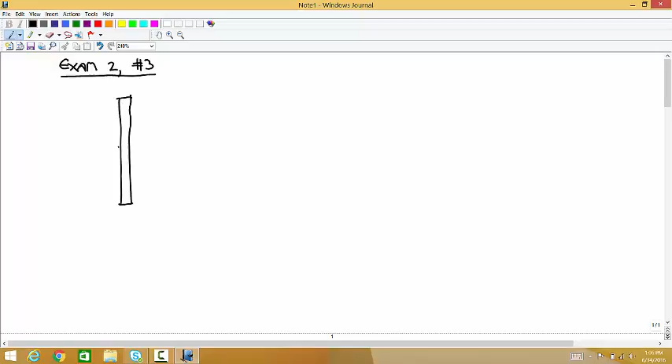So this is exam 2, number 3. It's the one with the beam positioned vertically. There's a 300 Newton force like that. It has a mass of 100 kilograms, so just to not clutter it up, I'm going to write it like that. But what this means is that that downward force is acting at the center. 981.

There's a pin joint at the top, so that's a full force vector. Then at the bottom, there's a pin and slot joint. And so you have a force with a known direction, call that RB, and you just represent that with one scalar variable.

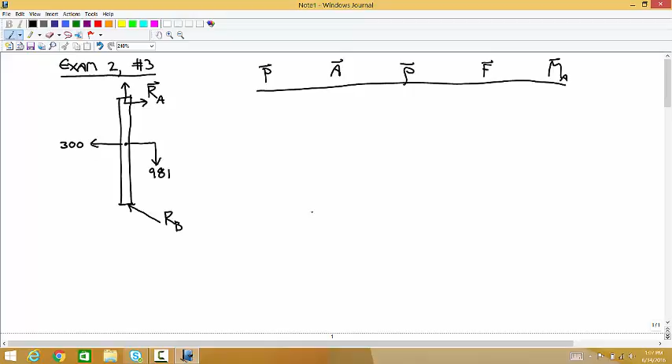And you can put your origin and about point wherever you want. I'm going to put both of them at A, at the top. So for that force vector RA, there's no rho vector, and so there's no moment.

This thing has a length of 2 meters. So these two forces that are acting right at the center are at the coordinates 0, -1. So the rho vector is 0, -1. The force vector, you can do them as two separate ones or combine them. If you combine them, you get -300, -981.

And then the moment is -300. And then the last force is at the bottom. That's 0, -2. The about point's the origin. So the rho vector is 0, -2.

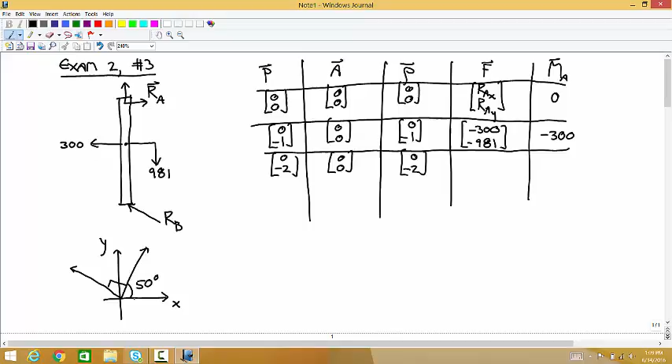And that force vector is at an angle, let's see. I think a good way to think about that is if there's your coordinate system, that slot makes an angle of 50 degrees with the x-axis, and then you have to go another 90 degrees to get to the direction that I drew. This is 90. And so this RB is acting at an angle of 50 plus 90, so 140.

So theta is equal to 140. And so that's -0.766 RB, positive 0.643 RB. And so you get whatever 2 times this is, -1.532 RB.

How did I get it? So on the coordinate system, I drew a vector that was pointing along the slot. And we know that the force is perpendicular to the slot, so it's 50 degrees to get from the x-axis to here, and then another 90 to get here. So 50 plus 90 is 140. Or I could have gone 50 to get there, minus 90 to get there if I'd drawn my arrow the other way. Or I could have drawn my first vector like this, and that would have been more complicated, but there's a few ways you can do it.

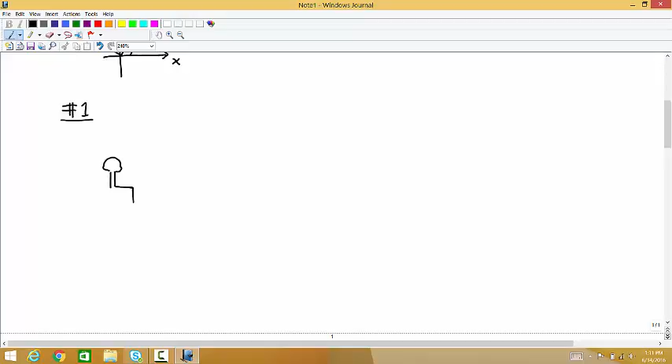So for these, you always isolate all the hanging stuff. So that's 1 pulley and the mass. The weight of this is 80 times 9.81, so 784.8.

And then coming out of what you've isolated are 2 cables. Well, it's the same cable, so they both have the same magnitude, but it's coming out at one point here and at one point here. So we'll call those both T since it's the same cable. And the angle representing this one is 80 degrees. The angle representing this one is 100 degrees. They're each 10 degrees off of vertical.

So Newton's second law says, well, this one is 80 degrees from the positive x-axis. This one's 80 degrees from the negative x-axis, which you could think of as 180 minus 80, so it's 100. And then the weight's 0, negative 784.8.

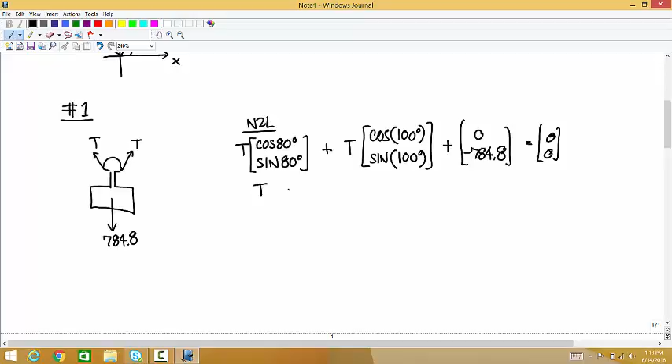And then you're solving for T. So that's for, and if you solve it, you get T is equal to about 398. So that's the answer for part A.

For part B, it's asking the force that the cable applies to the ceiling. So that's like, what's this force vector? Where this angle is 80 degrees. And so that force vector that's applied to the ceiling by the cable is equal to 398 times cosine of negative 80 degrees, sine of negative 80 degrees.

And then for the third one, the force you're looking for is the force the cable's applying to the wall. Where this angle's 30 degrees. And so the force on the wall by the cable is equal to 398 times the cosine of 150, sine of 150.

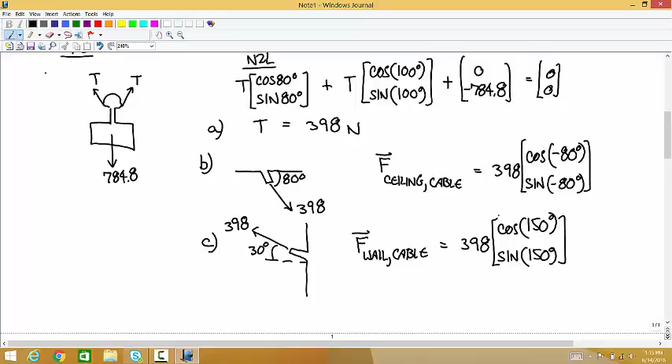By the way, what if I had asked what's the force vector that that pulley that's attached to the ceiling has to be in a fixed joint with the ceiling. What if I'd asked what are the loads applied to the ceiling by the, what do you want to call that, by the post for that pulley. Anyone have an idea how to do that?

Yeah, so let's just isolate that whole, let's isolate the pulley and the post that it's attached to. We're assuming this is weightless. So we have one force like this, we have one force like this, and we know what both of those are.

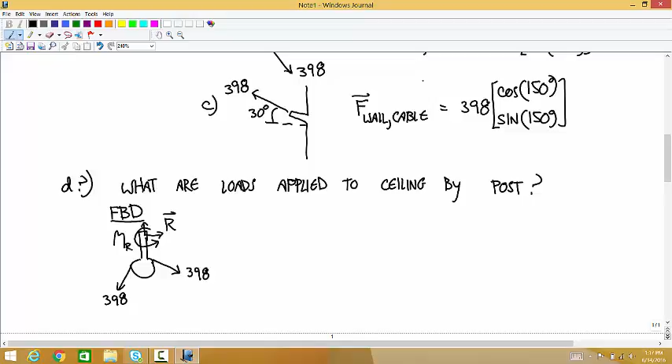And then this makes a fixed joint with the ceiling, so that means there's an unknown force R, and then a couple M R. And I guess if I had given this distance, this length, we could use Newton's second law and rotational Newton's second law to calculate R and M.

Any questions about that one? Any other questions about other parts of the test? I guess just the angle for the roller on number 2. Can you just set up that problem? Yeah, sure.

So number 2, it has a mass of 20 kilograms, so there's a weight of 196.2. There's a horizontal force of 500. There's a pin joint at the bottom, so I'll call that RA. And then there's a roller at the top, and that's perpendicular to the surface, so we know the direction of that.

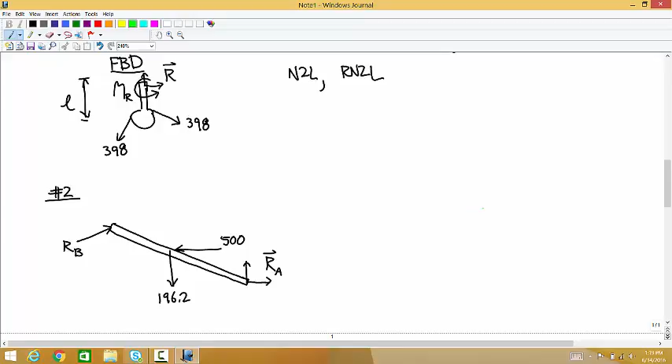To come up with that angle, I guess you could think of, okay, so there's a vector that is directed along the surface, and we know that this angle is 60 degrees. So to go counterclockwise from the positive x-axis to this vector is 120. And then we know our vector is perpendicular to that.

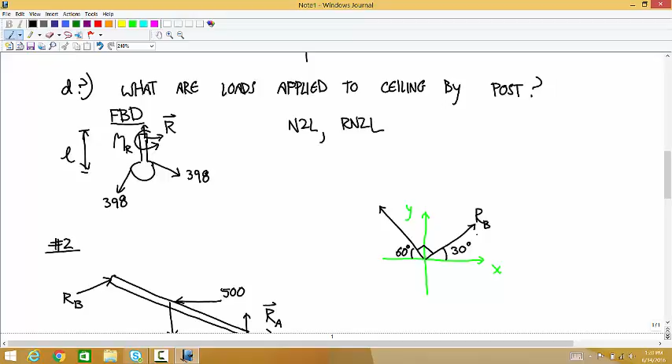This is the one that we want. This is the direction of that force RB. So we have positive 120 minus 90 gives us an angle here of 30 degrees. So that force produced by RB, I'll call it the vector FB, is equal to RB times cosine of 30, sine of 30.

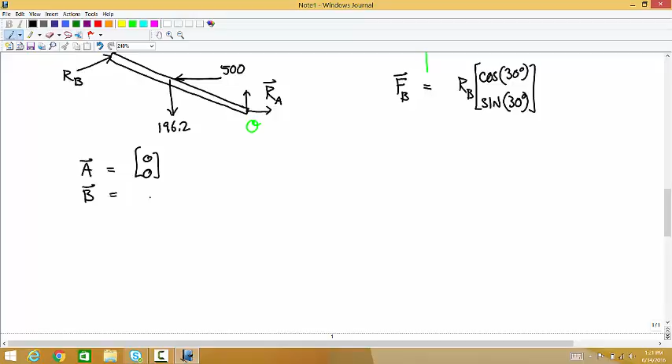If I put the origin down here, the point A is 0, 0. The point B is, what's the length? 1 meter? 1 times cosine of 150, sine of 150, which is negative 0.866, positive 0.5.

And then the point C, the midpoint, is the average of these two. So you can think of that as 0, 0, plus negative 0.866, positive 0.5, divided by 2. And so that's negative 0.433, positive 0.25. So now you have all your coordinates. You can represent all your forces as vectors, and you're ready to go.

Okay. Number 4, really the only mistake people made consistently was that 400 Newton meter couple was in the clockwise direction, so you had to make it negative. Okay, so that's the test.

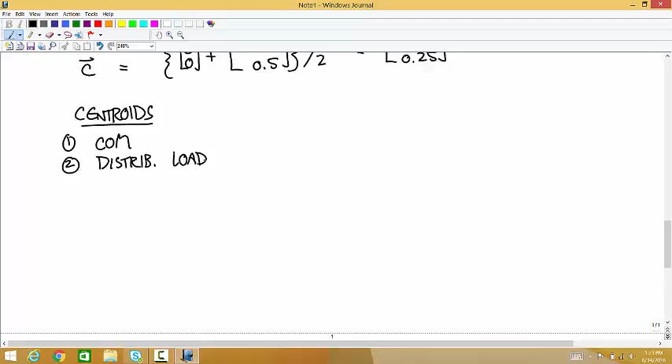The center of mass of an object is important in a lot of ways in mechanics. In statics, the only thing that it's important for is figuring out where to apply the weight force. In dynamics, it's more important because F equals ma says that the acceleration you care about is the acceleration of the center of mass. But so for statics, it's just the weight that we're dealing with.

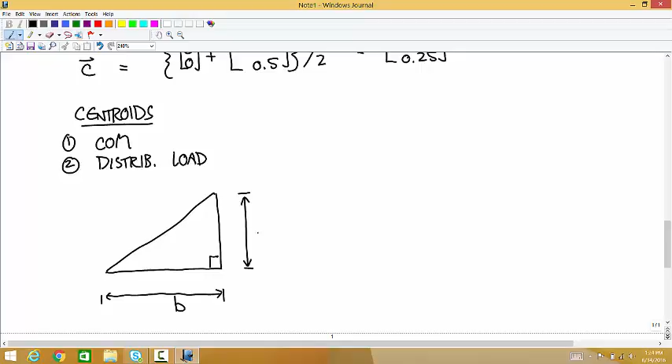And I went through a calculation that says for a right triangle, a general right triangle, with a base B and a height h, we calculated that the center of mass is here, where this distance is base over 3, and this distance is height over 3. And we did that using the complicated integral formula. So I want to show a calculation of how you use this.

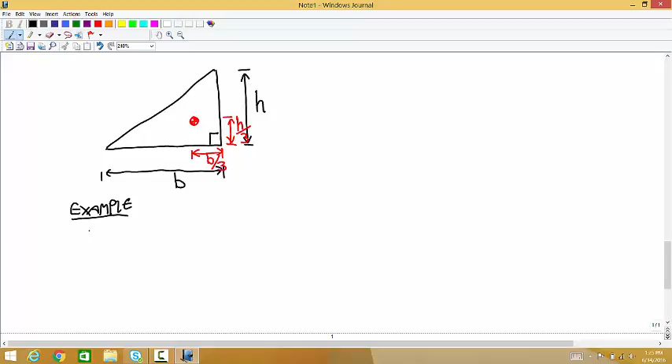So say that you want to figure out the centroid for a right triangular shape where this is a right angle, this distance is 2, this distance is 5, and let's say that the origin is at the top. Okay, well, we know that the centroid is here. How do we know that?

I guess the way you can think of using this triangle formula is for each one of these two dimensions, along each of the two legs, one side of that leg intersects like a wall, and the other side runs into a point. That's how a triangle works. Maybe you've never noticed that before, but I bet you have. So we're going 1/3 of the way from the wall toward the point, no matter what direction it's oriented.

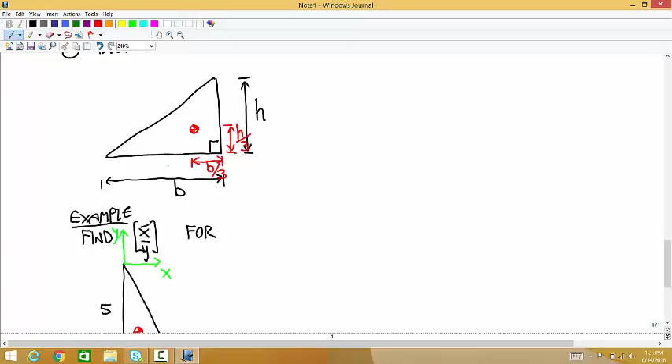That means that this distance from the wall towards the point is that full distance over 3, and this distance is 1/3 of that length, so 2/3. Okay, so we know those distances, but now we have to translate those into coordinates, and you have to be able to kind of... it just takes a little geometric, physical thinking about directions. So okay, if we know this distance is 2/3.

Finding the x-coordinate is pretty easy because it's 2/3 in the positive x direction from the y-axis, so this is just going to be 2/3 x. But it takes a little more thinking to figure out what the y-coordinate is going to be.

The way I'm going to do that is think of this: if you're all the way down at the base, that would have a y-coordinate of -5, but we're not going quite that far. We're 5/3 short of 5. So this is going to be -5 plus 5/3, and so that's -10/3.

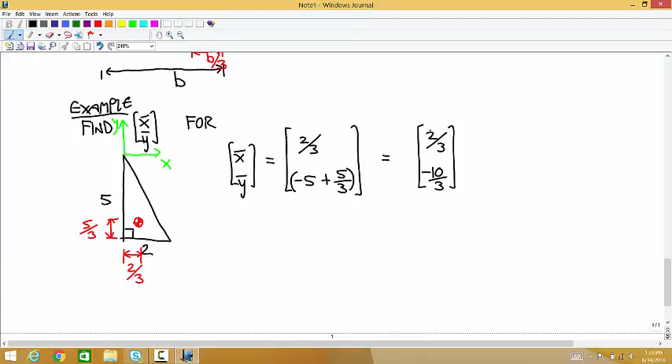Any questions about that? Using these formulas, that's really what it's going to be about, just turning these shapes around in your head, going from distances that you know to translating that into coordinates. I'm going to give you a few other formulas for a few other shapes. There's a list of these shapes on D2L. I'm not going to tell you all the ones on there, just the ones we're going to use in our problems.

The first one is a right triangle. For all of these, I'm going to give you the x centroid and y centroid. If this is the centroid location, I'll call this distance y centroid, this distance x centroid, and I'll give you the area too. So the x centroid distance is b over 3. That distance y bar is h over 3. And the area is bh over 2.

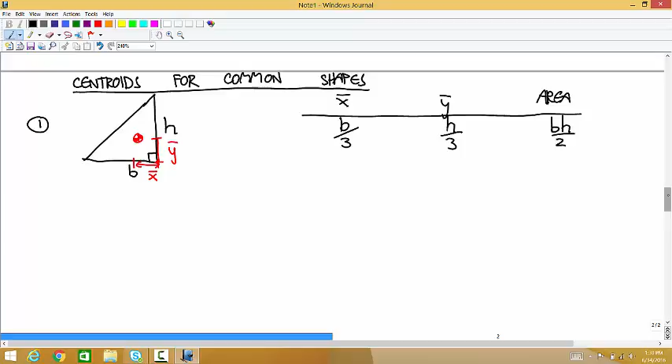Next, I'm going to do a semicircle. The radius is r, call that lowercase r. The centroid is here, we'll call this distance y bar. The x location of the centroid is nothing, it's right on the center line. The y location of the centroid is 4r over 3 pi. And the area, well, you know the area of a circle is pi r squared, so this has to be pi r squared over 2.

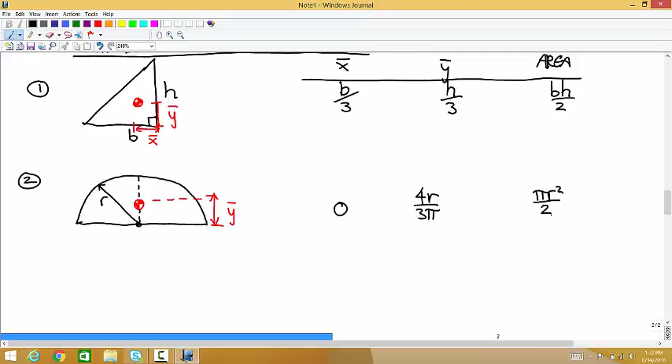Next is a quarter circle. Again, the radius is r. That distance we'll call x bar, this distance we'll call y bar. Then x bar is 4r over 3 pi, y bar is 4r over 3 pi. And the area of the quarter circle is pi r squared over 4.

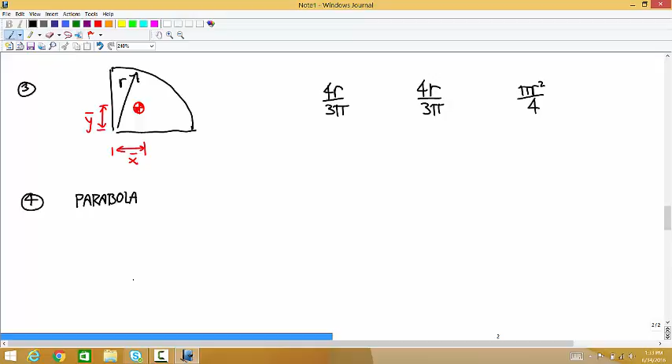The next one is a parabolic shape. The centroid is right on the center line, so there's no x bar. And that y bar is 3h over 5, where this distance is h. And the area of that shape, let's also define this length A, that's 1/2 of the width. Then the area is 4AH over 3.

And then the last one is half a parabola, a semi-parabola. So again, let's say the height is h, and A means the same thing it did before. Then we'll call this distance x bar, and this distance y bar. So x bar then is equal to 3a over 8. Y bar is equal to 3h over 5, the same as it was for the full parabola. And the area is half what it was before, so this is 2AH over 3.

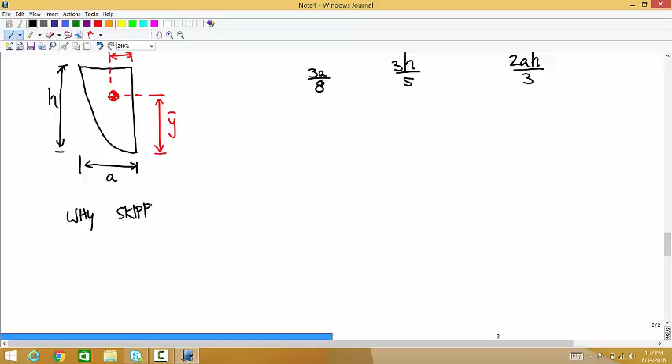There are two shapes missing from this list that seem sort of obvious that we would definitely want to know. Why are we skipping a rectangular shape and a circular shape? The reason those aren't in this list is because of the next thing.

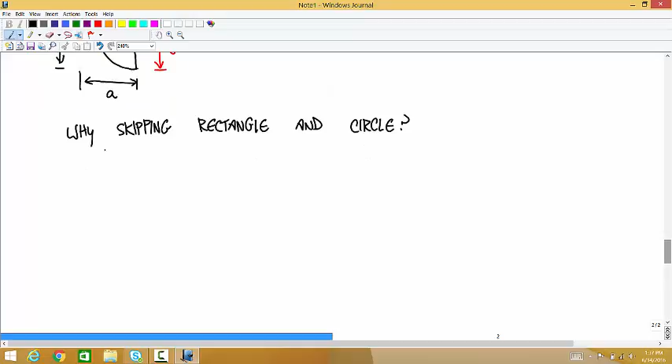One key fact for finding centroids: if you can find a line of symmetry in the shape, the centroid has to lie on that line of symmetry.

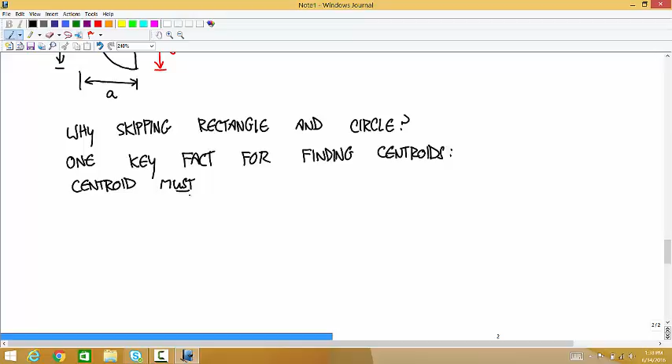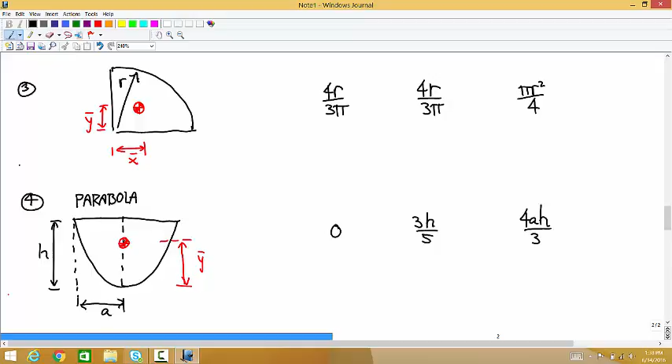We saw that in a couple of these shapes. There are two shapes in this list that have lines of symmetry. The semicircle has a line of symmetry up the middle, and the centroid lies on that line. The parabola, same thing, there's a vertical line of symmetry, and the centroid lies on it. This means that any shape where you can find two lines of symmetry, the centroid is defined — it has to lie where those two lines of symmetry intersect. So if you can find two lines of symmetry, the centroid lies at the intersection.

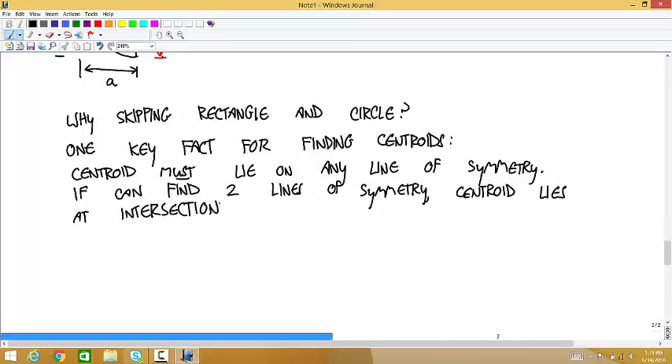What that means is for a rectangular shape or a circular shape, the rectangle has a line of symmetry there and a line of symmetry there, so we know all we need to know about the centroid — it just is right at the middle. The circular shape has a line of symmetry there, and a line of symmetry there. You can find infinitely many of them, but any two you choose intersect at the same point, so that has to be the centroid.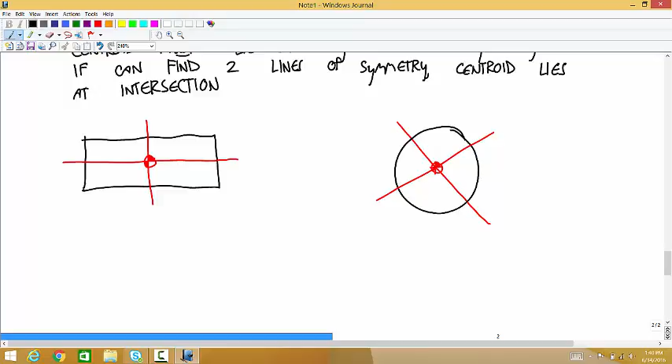The same idea works in 3D. We're not going to do 3D centroids, but the same idea works in 3D.

The difference is in 3D we're talking about planes of symmetry. So the centroid must lie on any plane of symmetry. Two planes that intersect at a line - that's not enough anymore to specify the location of the centroid. But if you can find three planes of symmetry, those intersect at a point, and that point defines the centroid.

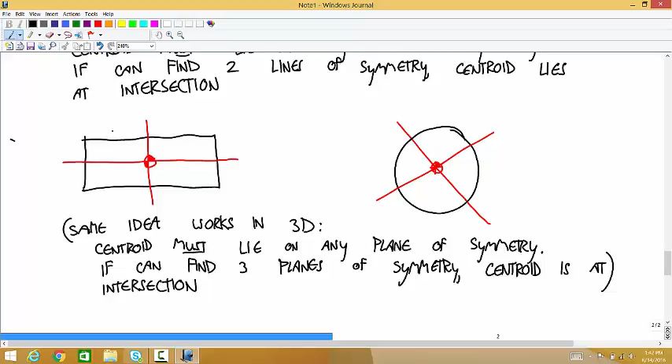Okay, so now using these formulas for more complicated shapes. I've given you a list of 4 or 6 or so shapes, if you include the rectangle and the circle. But obviously most of the things you're going to want to deal with are not any of those shapes. So how do you use these simple shapes to come up with the centroid of complicated shapes? I'll call that building up complicated shapes from this list of simple shapes.

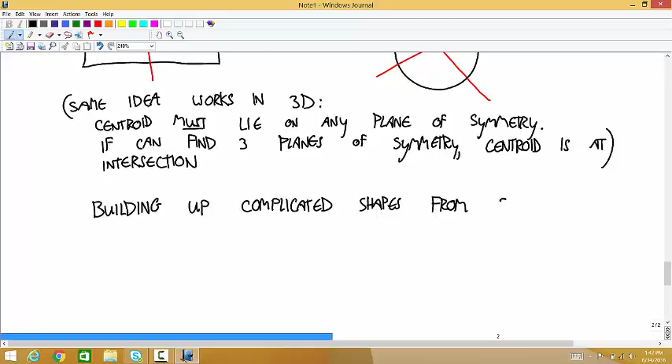The way you do that is there's a sum formula that you can use for centroids, and it looks very similar. It's sort of like a finite version of the integral formula. You can think of it as the centroid of the whole body is equal to 1 over the total area times the sum over all the simple shapes. Let's say there's n simple shapes, so the sum from 1 to n of the area of each simple shape times the centroid of each simple shape.

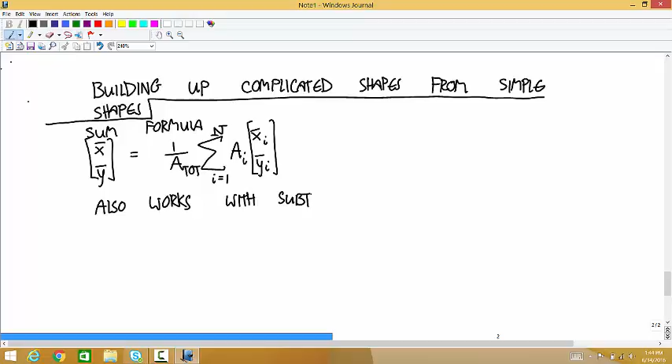And it also works for subtracting one shape from another one. So x, y can be equal to... okay, let me draw a picture here. So say you have this shape, and you want to remove this shape. Call the whole thing A, and the inner thing A1.

Then the centroid of just, you see what I'm getting at here. So you have this sort of funny donut shaped thing. You want to find the centroid of that. You can do that as 1 over A minus A1 times the quantity A times the centroid of the outer shape minus A1 times the centroid of 1.

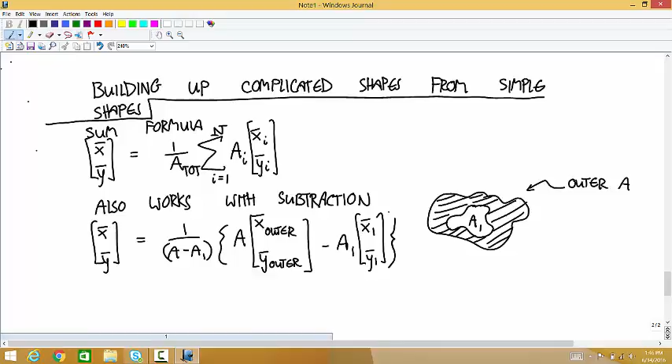The same idea works in 3D. Since we're not going to use this, I'm putting it in parentheses again. But the centroid of a complicated shape is equal to 1 over the total volume times the sum over all the pieces of the volume of the piece times the centroid of the piece.

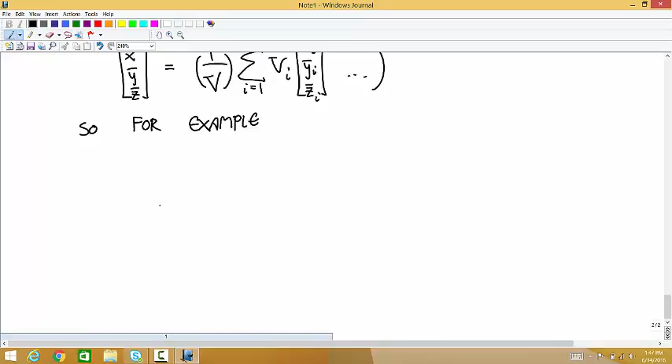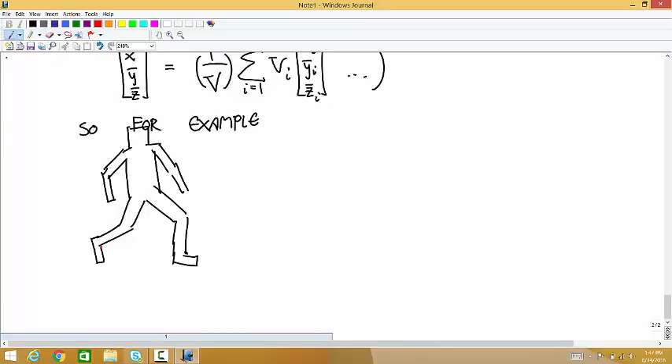The subtraction thing works too. So, for example, if you want to find the center of mass of a person, you could approximate their body with a bunch of rectangles. You can make it as complicated as you want. Break it up into this, this, this, this. That's not a rectangle, that's a triangle, I suppose.

You know what I mean. Break it up like that. Call this body 1, 2, 3, 4. Go through all those pieces. Find the centroid of each of these individual things and the area of each of these individual pieces, and then use that sum formula to come up with the center of mass of the whole thing, the centroid of the whole thing. Any questions about that?

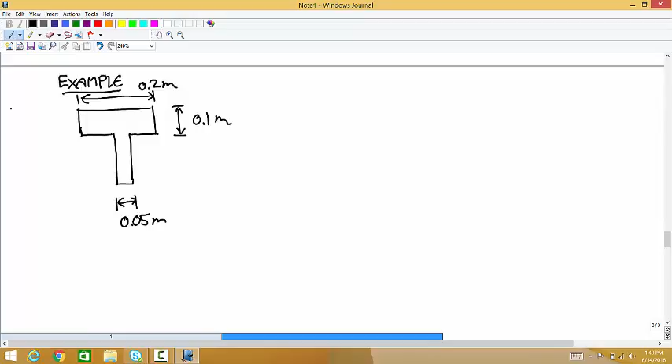Okay, let me do an example. So let's say we have a T shape. Where this distance is 0.2 meters. This is 0.1 meters. This is 0.05 meters. And this is 0.2 meters. And let's put our coordinate system here, right on the center line.

And we want to know what the centroid is. Well, we already, without doing any calculations, know one thing about the centroid. We already know one of the two components. Can anyone tell me what that is? Yeah, it's got to be on that y-axis because that's a line of symmetry of this shape. So the only thing we have to figure out then is the y component of the centroid. We know that x bar is equal to 0 from symmetry.

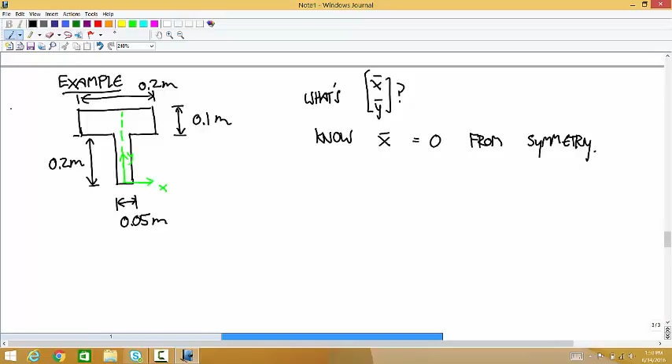So let's break this up into these two rectangles. I'll call that 1 and that 2. I'm going to figure out the location of the centroid, the coordinates of the centroid of each of these, and figure out the area of each one.

So for rectangle 1, I guess we only have to do the y components, that's what I said up here. So what's the y centroid coordinate of rectangle 1? It's up 0.2 to get to the bottom of the rectangle, and then another 0.05 to get to the center. So that's 0.25. And the area of that rectangle is 0.2 times 0.1, so 0.02.

And then rectangle 2. What's the location of the y centroid for rectangle 2? Yep, positive 0.1. And the area of that is 0.2 times 0.05, so 0.01.

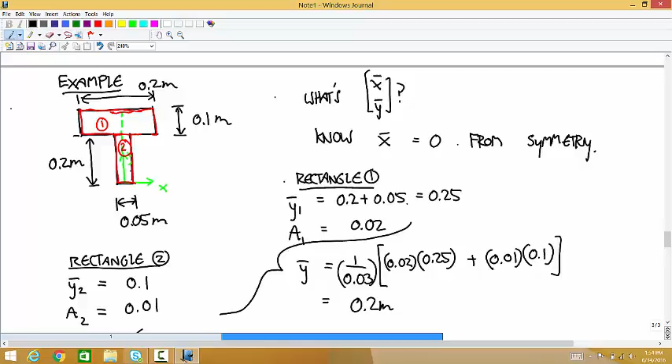What are you multiplying in the parentheses, 0.02 and 0.25? I'm multiplying the area of the individual shape times the centroid of the individual shape. You can't add up all the areas and add up all the centroids and multiply those. Nope, it's different. Doesn't work like that.

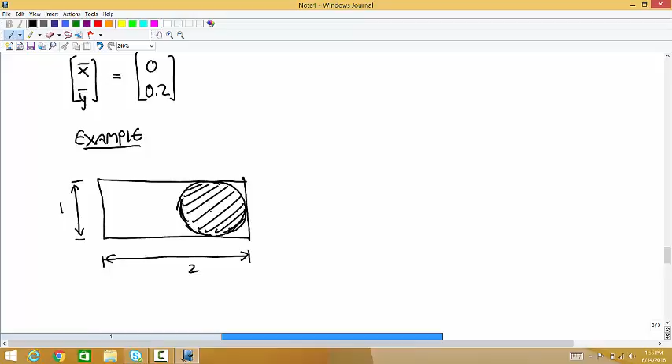Let's do this one when we come back. So let's say we have a rectangle where this is 2, this is 1, and then we remove a circle from it. The circle is completely inscribed in this half, so the circle is removed from the rectangle. What's the centroid? And I suppose let's choose a coordinate system like this. Okay, so start again at 206.

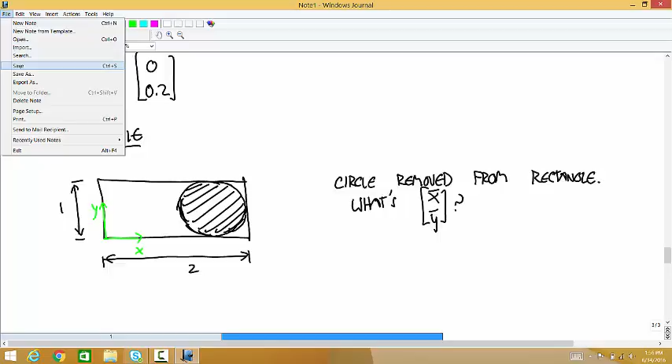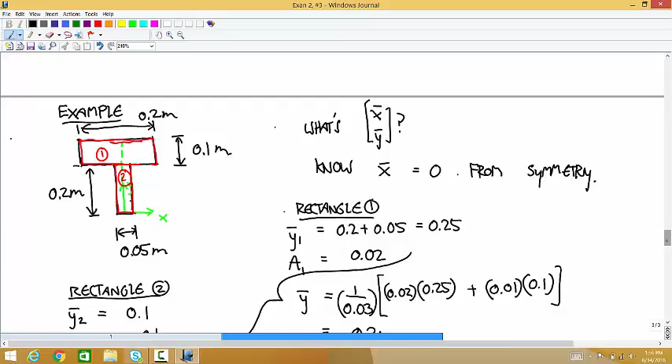So let's calculate the centroid of this shape. I'll say shape 1 is the full rectangle, and shape 2 is the circle. So for shape 1, the area is 2 times 1. What's the centroid of the rectangle in this coordinate system? Yep, it's 1 over the middle of the rectangle, and 0.5 up is the middle of the rectangle. Everybody see that? And then for shape 2, the area is, so the radius of this circle is 0.5, so the area of the circle is pi r squared, which is 0.25 pi, or pi over 4.

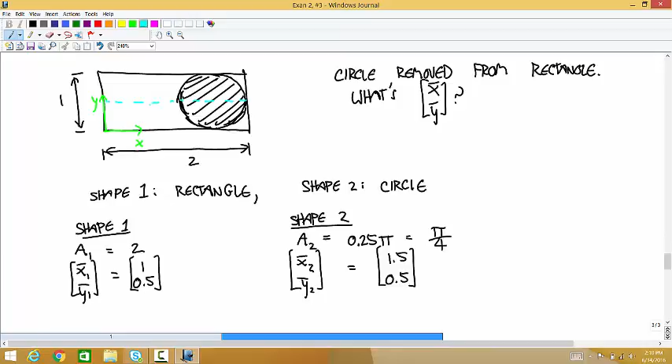A total is 2 minus pi over 4. And so now we can use that sum formula. The total centroid is equal to 1 over the quantity 2 minus pi over 4, times the area of the rectangle times its centroid, minus the area of the circle times its centroid.

Could someone calculate that and let me know when you have an answer? I guess you can skip the y components if you want. We know that's going to come out to be 0.5. 0.68, and this is 0.5. So the centroid is somewhere over here.

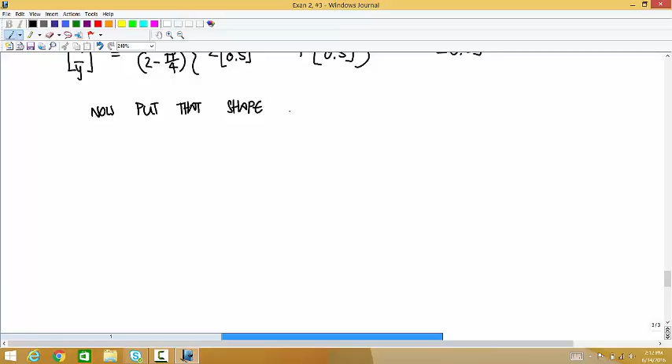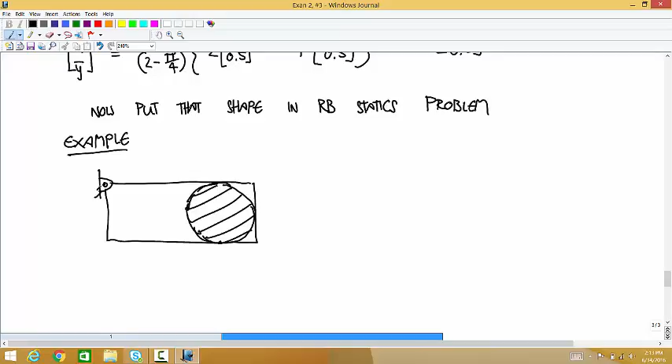And so now the way you would use this in a rigid body statics problem: imagine that shape connected to a pin joint up here, and a roller at the bottom. Let's say the total mass is equal to 100 kilograms. What are the reactions?

Well, free body diagram. We have a force vector up here at the pin, call that RA. We have, I'll call that N, the normal force from the roller. And then we have a weight force acting down, acting at the center of mass of the body, and that's equal to the mass of the object, so 981.

So now I'll fill out the table. P, A, rho, F, MA.

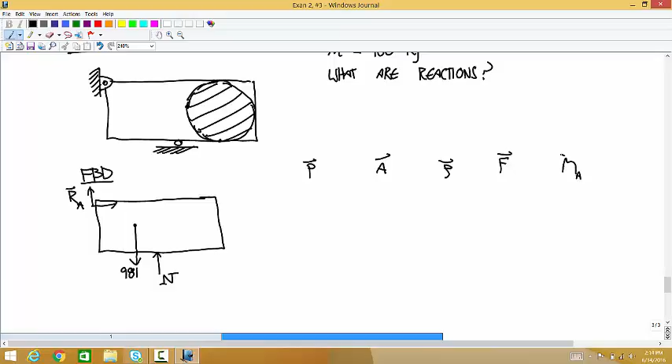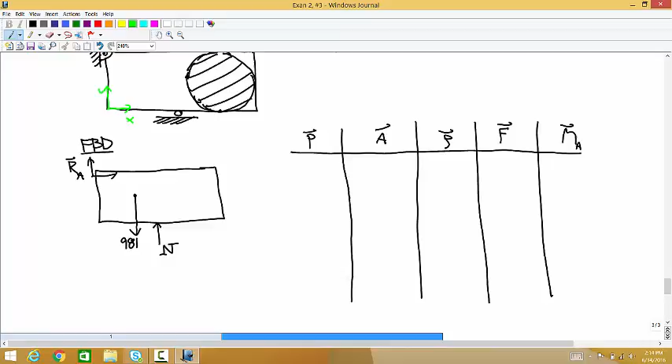Well, I'm going to use the old coordinate system, this one. But I'm going to choose A as the about point, just because I can. So point A, the coordinates are... 0, 1. The about point is 0, 1. So this force vector RA doesn't have any row vector. The forces are X and Y components, and the moment's 0.

Now I'll do the weight force. That was the location we just calculated when we did the centroid, so that's at the location 0.68, 0.5. The about point is 0, 1. So the row vector is 0.68, negative 0.5. The force vector is 0, negative 981. So what's 0.68 times negative 981? Negative 667.08.

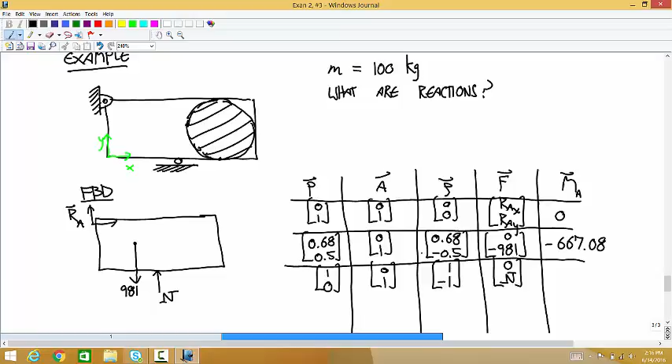And then the last one is that normal force. That's at the location 1, 0. About point is 0, 1. So the row vector is 1, negative 1. Force vector is 0, n. The moment is n.

So Newton's second law says RAX, RAY plus 0, negative 981 plus 0, n is equal to 0. The moment equation says negative 667.08 plus n is equal to 0, so n is equal to positive 667.08. And so RA is equal to 0x, and what's 981 minus 667.08? 313.92 newtons.

And you can see that that 0.68 came into the calculation in the moment produced by the weight. So changing the shape to move that centroid around, like say you moved around where this missing circle was, it would affect the reaction forces.

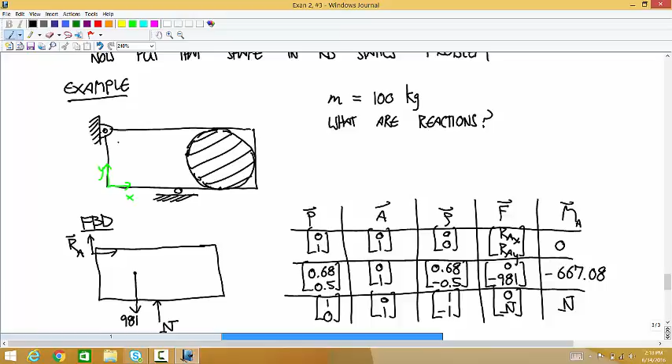Okay, so in your free body diagram, include anything about the effect of having the circle out? Is it just easy by shifting the forces around? Yeah, I don't think there's any reason to, I mean, I wouldn't object to drawing that gap in the free body diagram, but that's probably more detail than is really helpful. I just tried to draw a fairly accurate location for where the weight force is. That sort of has the same effect.

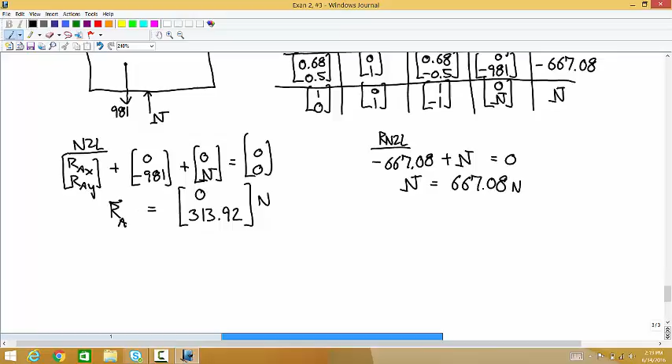Okay, so that's how you, one more thing about that. Notice that when you're using the centroid to figure out where the weight force is applied, you never care about the y position of the centroid. It never matters in the problem, and that's because you can always move the weight force along its line of action, which is up and down. So you could always calculate the horizontal centroid and just leave the y centroid as 0 for the calculations. Okay, so that's how to deal with the weight of, so far in this class we've only dealt with rectangular objects and circular objects, but now if you have other shapes, that's how to figure out where the weight force is applied. So now let's talk about distributed loads.

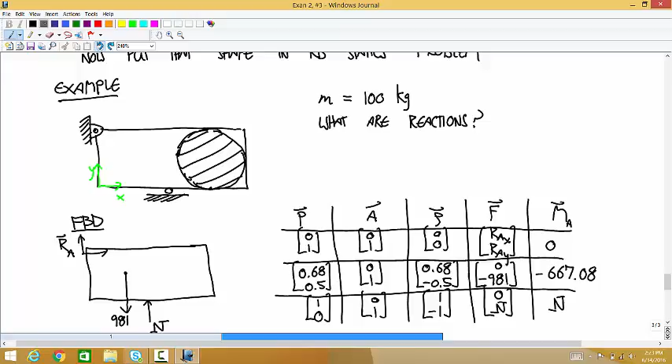When I do try to talk in Spanish, I have to explain my way around everything because I only know like 7 words. So I'd have like centroid would be like the place between the left and the right, you know?

Okay, so distributed loads.

Or like I was trying to say the song Freebird to my friend in Spanish recently, and all I could come up with was Parrot of Liberty.

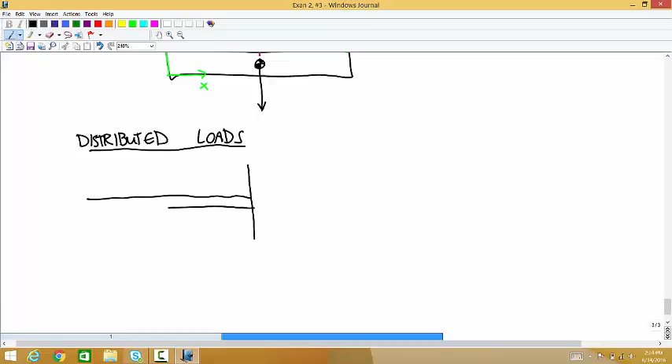Okay, distributed loads. So here's like a rigid body problem, we've done a lot like this. You have a fixed joint with the wall, say it's 2 meters long. But the loads we've dealt with so far have been point forces, maybe a point force acting at the end or something. But you can also have these forces spread out over some finite length or area.

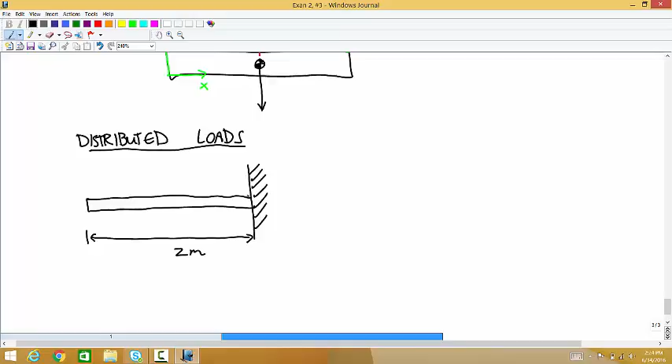And the way that appears in problems is like this. They'll draw a shape and say that at any given location, the height of this distributed load tells you the number of newtons per meter being applied at that location. So let's say over here at the right end, this is 10,000 newtons per meter.

And the way to think about this: distributed load versus force vector. Think about this as an analogy with instantaneous velocity versus distance traveled.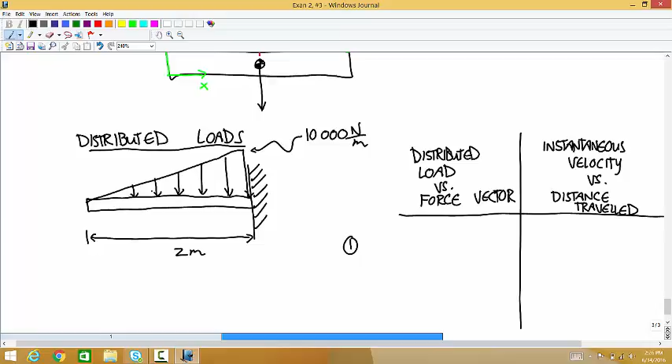So first, if you have a distributed load like this acting on this shape, what's the total force applied, say, at this point here? The answer is there's no finite force applied at a single point. Just like in a single instant, your car doesn't travel a finite distance at a given speed. You have to integrate it over some amount of time to get a finite distance. It's the same with this—a distributed load only produces a finite force over some finite interval.

So a distributed load only produces a finite force over an interval of distance, or let's say an interval of x. It's the same as if you're talking about a car moving with an instantaneous velocity or speed—it only travels a finite distance over an interval of time.

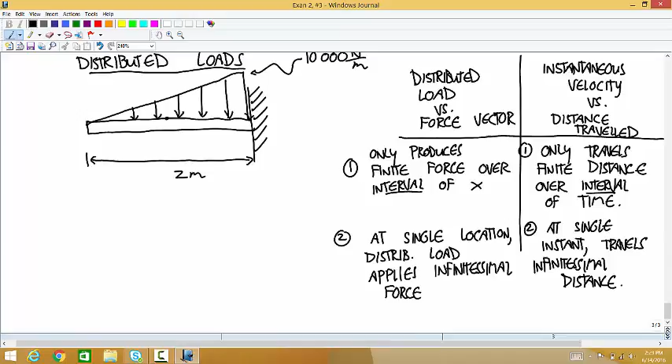Okay, so what we're going to do with distributed loads is figure out how to come up with an equipollent system where that distributed load is treated as a point force, because we know how to deal with point forces. So for calculations, we want to find an equipollent system where the distributed load is replaced by a point force.

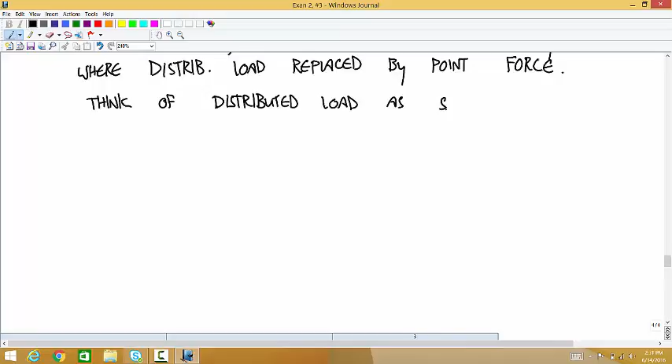So the way to do that is think of the distributed load as a shape. For example, the one I just did above, that shape is a right triangle—it isn't drawn to scale, but you can still do the calculation. The height on this side is 10,000 newtons per meter, the base is 2 meters. Then the total point force is the area of the shape, and second, that point force is applied at the centroid of the shape.

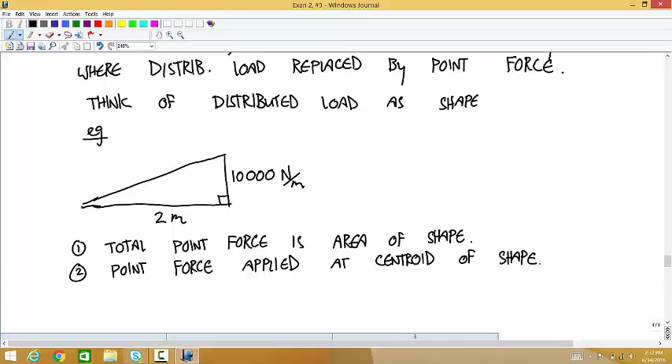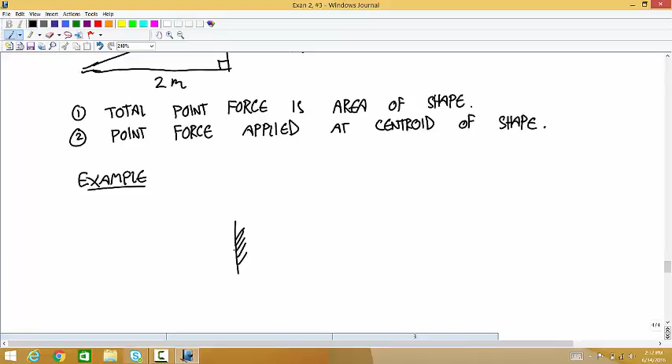Okay, so let's do this example. So we have a fixed joint with a wall, a 2 meter long cantilever beam, a triangular distributed load, and we want to know what are the reactions at the wall.

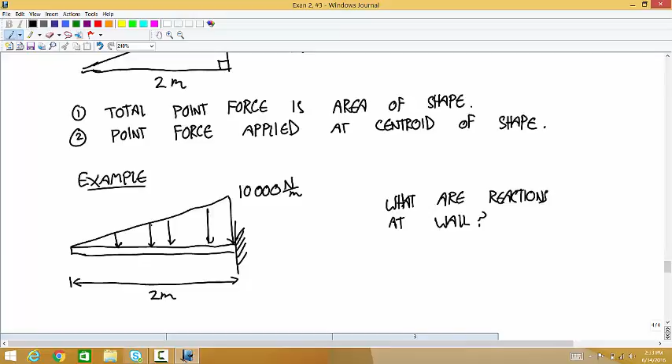Well, in order to replace this distributed load with a point force, we have to calculate the area of that shape to figure out the total point force, and find the centroid of that shape to figure out where we can apply it. So if this is 10,000 and this is 2, the area equals base times height over 2, so 10,000. And what are the units of the area there? It's Newtons—all the units are going to come out just right on this.

And then the centroid is equal to—we're going to use the formula for a right triangle. Let's choose a coordinate system, put it here. So it's going to be 1/3 of the way along the 2 meters, so that's going to be -2/3. And it's going to be up 1/3 of the way along the 10,000, so that's positive 10,000 thirds. This is in meters.

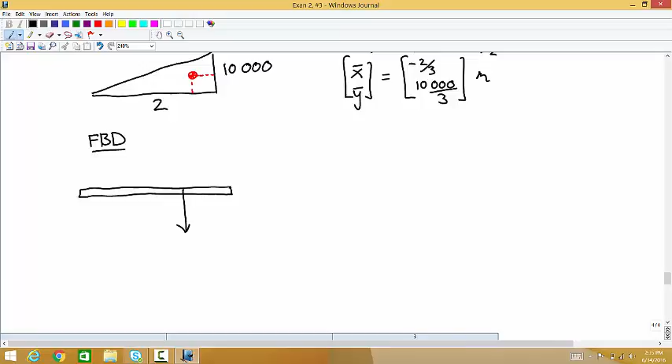So I'm going to draw a free body diagram now of the beam. So we have a downward force of 10,000 newtons, acting at a distance of 2/3 from the wall. And then at the wall, this is a fixed joint, so we have a force vector, call that R, and a reaction moment, MR.

I'll write out the table.

Okay, the origin is at the wall, so R acts at the origin. I'll make that the about point too. So the r vector is 0. Force vector is Rx, Ry. Moment is 0. Then there's that reaction couple. We don't care about any of this stuff, so that's MR.

And then there's this point force we just calculated. This one won't matter, so I'm not even going to put it in there. But if you want to put it in, it's fine. It won't mess anything up.

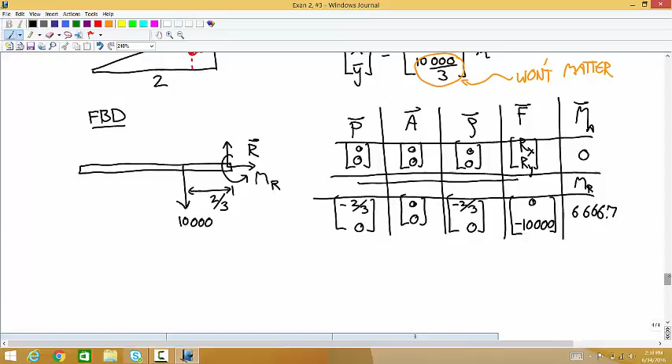And now the two equations: you have Rx, Ry, plus 0, negative 10,000 is equal to 0. And the moment equation, you have Mr plus 6,666.7 is equal to 0.

So the reaction force at the wall is 0, positive 10,000. And the reaction couple at the wall is equal to negative 6,666.7 Newton meters.

And the value of that reaction couple would have changed depending on where this point force acted horizontally. Any questions about that?

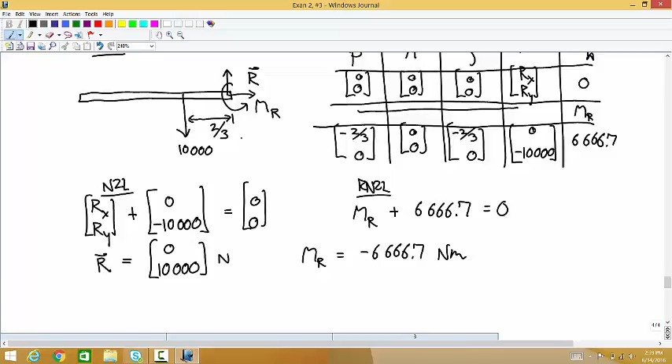Let's do one more. Okay, I'm going to do a cantilever one again because the calculations are the easiest, and we can just focus on the centroid, on the distributed load.

So let's say that we have a cantilever beam. Maybe let's put the wall over here this time. And let's say we have a distributed load that's rectangular, where this is 5,000 newtons per meter. And let's say that this is 0.5 meters, and this is 0.5 meters. And let's say also that the mass is equal to 50 kilograms.

What are the reactions? Okay, well, first let's figure out what's going on with this distributed load.

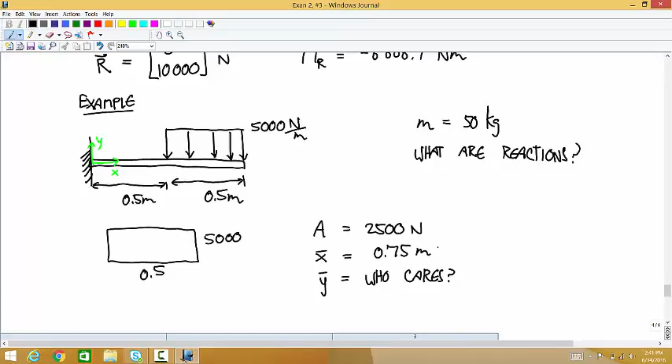So, free body diagram. We have the weight acting at the middle of the beam. How big did I say that was? 50. So that's 490.5. And then here we have a force of 2,500. And then at the fixed joint we have a reaction force and a reaction couple.

And you can fill out the whole table for this, and if you're comfortable with that, keep doing it. We're going to do a lot of these horizontal beams for the next couple topics, and you'll get pretty good at doing these without filling out the table.

So Newton's second law says Rx, Ry plus 0, negative 490.5, plus 0, negative 2,500 is equal to zeros.

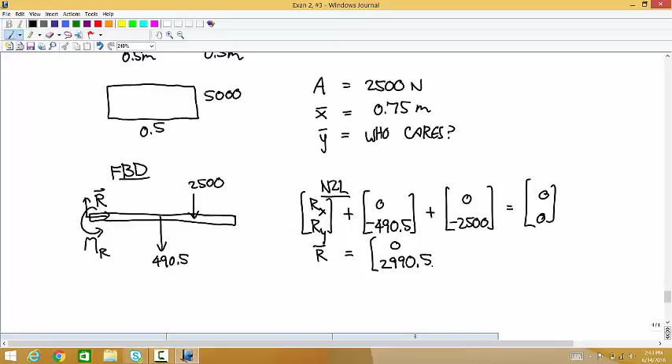And now for the moment equation. We'll make the about point at the left end point. So what's the moment, if the about point is at the left end point, what's the moment produced by this R? It's 0 because that force is acting at the about point.

That couple you always just add on. It doesn't matter what the about point is. That's a pure moment. Then you have the 490.5 acting with a moment arm of 0.5. So we have the moment arm, we have the 490.5. Now all we have to think about is, would that cause a positive or negative rotation around the about point? It's clockwise, so it's negative.

And we'll do the same thing with this one. What's the moment arm, the distance from the about point to the 2,500 force? Yeah, 0.75. The force is 2,500. Would that produce a positive or negative moment? Negative again. All this is equal to 0.